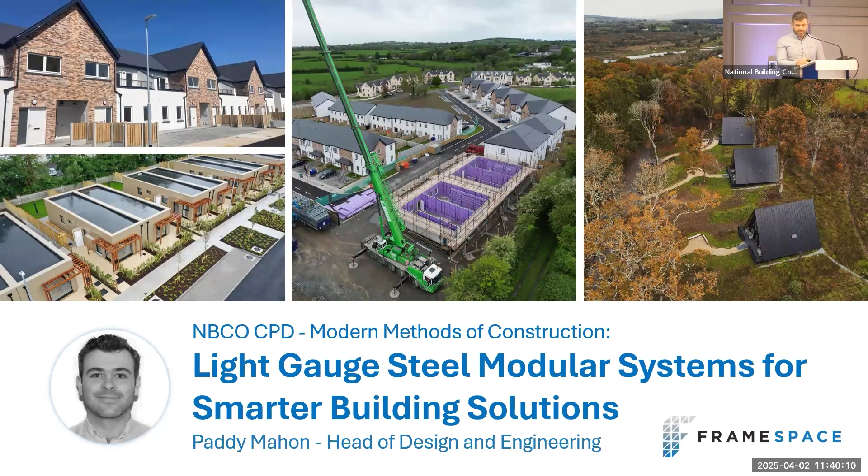My name is Paddy Mahon, as has just been introduced, and this presentation's title is Light Gauge Steel Modular Systems for Smarter Building Solutions. So what we're going to cover today: we'll do a brief introduction about Framespace, we'll talk about our processes, some testing and analysis we've carried out on our system, certification, some collaborations, embodied carbon studies we've done, and we'll run through some case study projects as well.

So about Framespace, we were started up in 2016. We're based in Longford Town, and we specialise in design and manufacture of light-gauge steel building systems for the residential and commercial sectors in 2D and 3D solutions. So what we do, we started off initially solely focused on a 2D panelised system, so category 2, a closed panel system with varying levels of finish applied in the factory. So we'll see a few pictures of that in a minute. And that expanded into 3D volumetric over time. So we do a modular solution now, and we try to get as much pre-manufactured value completed off-site with varying levels of finish externally and internally.

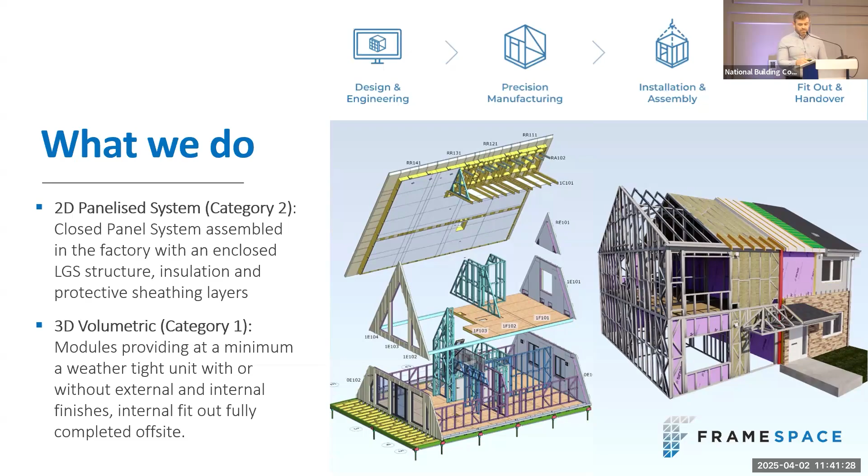With the 3D volumetric solution, you'd be looking at a pre-manufactured value of plus 90%, obviously depending on the building layout and the design of it. The fit-out is completed off-site, but early engagement and considerations are important if it's going to be incorporated into a project, and the buildings need to be designed from the outset really to incorporate that into them. It has a very high level of cost and program certainty, with the civils and substructure and just tying in between the modules completed on site.

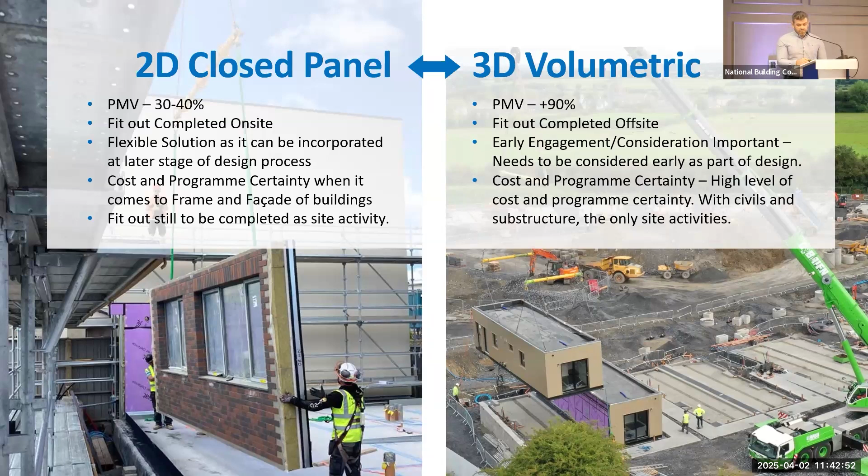So looking at our processes, our design and build workflow, we operate in a fully digital workflow from design to handover. So we operate in a common environment, both in design and factory and install. So we use Autodesk Construction Cloud for design, development, collaboration. We get the architectural plans in, we'll do architectural models, we'll work through the engineering, we'll develop the steel models, the M&E models, so everything is coordinated fully. From that, the fabrication information is extracted from the models automatically in some cases and just checked, and then that gets fed to the factory floor through our WrxFlo platform, which is our factory production control platform, and that follows onto site and is followed up on site through ACC inspections.

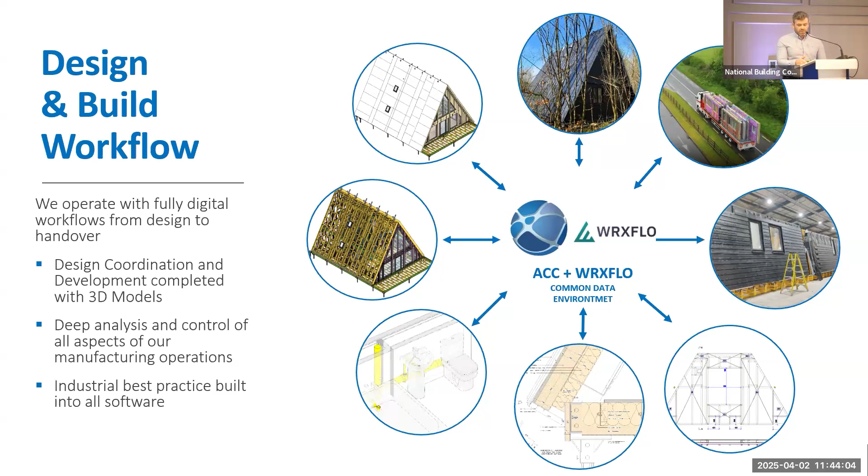So just to talk about our factory production control, we use a WrxFlo system, so it's a digitized platform for planning projects. All our QA checks are built into the platform as well. So at each station, guys check into a panel, they carry out their quality control checks specific to the activities that they're working on, and then they sign off. So it automatically generates a passport for each panel or each module, whatever we're actually working on. And the checks are tailored to the project specification that we'll be working on as well. It also tracks consumption and gives us full traceability on the materials used for each panel, each module.

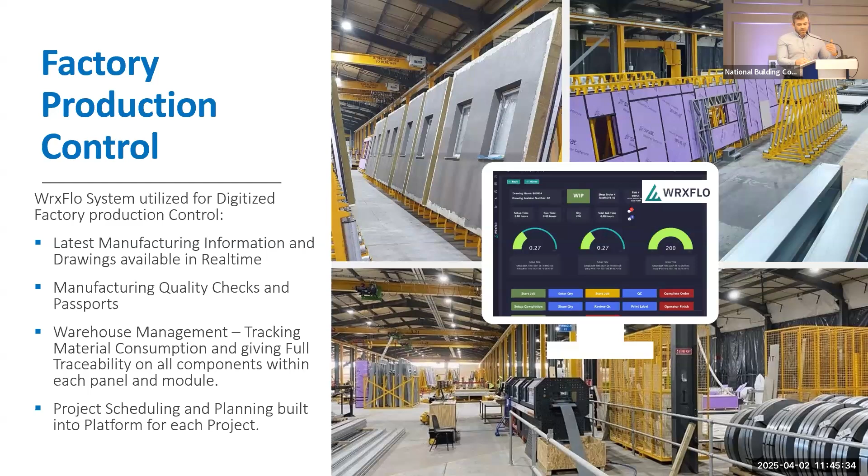So say with a panel, we'd have full traceability of what steel coil was used for that particular panel, where it came from, what date it arrived into our factory, who rolled it, all the way through to final sign-off, what lorry it got put on, and that follows through to the site team. We also do all our project scheduling on that, so the project is scheduled out on the platform, and then the floor operatives know what panel they're working on next. So it's all systemized in a way that they're built in the order that they would need to be installed as well. So that all works through.

So our QA/QC systems are, as I said, built into both WrxFlo and ACC. The factory control checks are carried out in WrxFlo for the factory, and as I said, the quality passport is produced for each panel. Again, we have 100% traceability for every profile manufactured in our plant, and then the site and install checks are carried out on ACC Build, which can be done on tablets on site with photos taken and the quality checks

built into it. I suppose the other important point to make is at the project outset, there's a project-specific inspection and test plan developed, and that's developed in conjunction with the design teams that we're working with, who will be carrying out ancillary certification, the assigned certifier. So we'll go through what checks we're carrying out, the different hold points, witness points that different team members want to be part of as well.

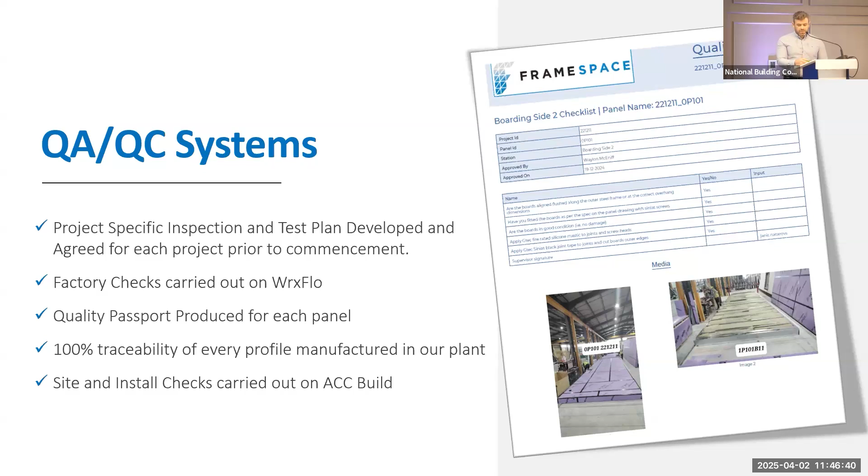So yeah, the majority of our workforce are direct labour. From an installation perspective, we do use some closely related third-party subcontractors as well, but all our sites are managed by our own project managers and site managers.

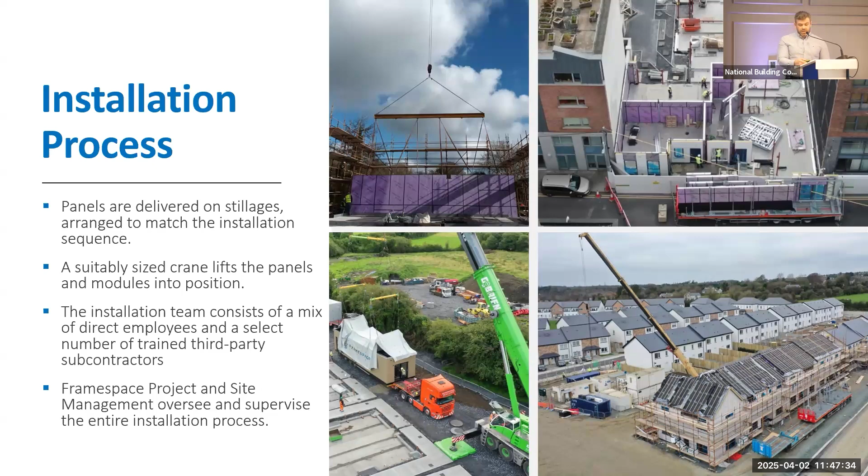So talking a bit about some of the testing and analysis that we carry out for our projects and for our system. So structure, Part A, which should be standard for all projects. All elements of the project are designed to project-specific conditions, such as location, building height, and elevation. They're designed and certified by a competent, qualified structural engineer. So they'd basically carry out a calculation package, they'd structurally model the building, and all of that would be part of the handover pack as well.

From that, we model all the steel in, both the LGS and any hot rolled steel elements. So that's done in-house by our own team, and is reviewed and signed off prior to manufacture by the structural engineer that had called up the different profile sizes and member sizes. So we would use Vertex for the LGS detailing, and we would use Tekla for the hot rolled steel detailing.

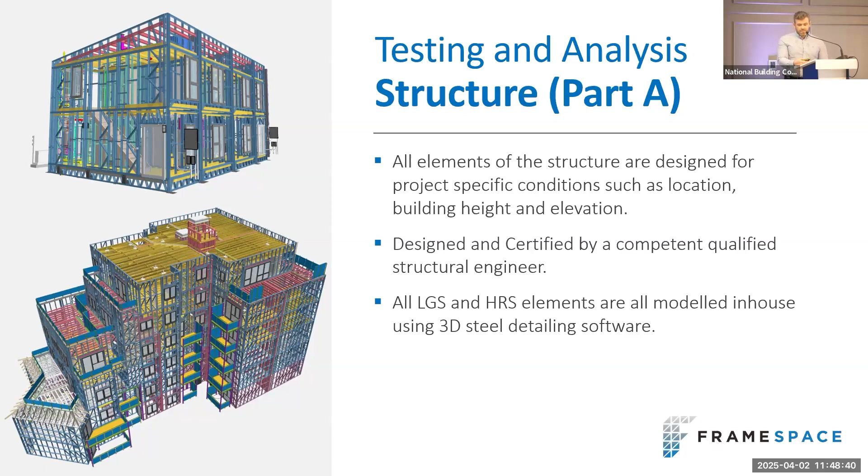Fire, Part B. So we have a full suite of loaded fire tests on our system for external wall, compartment floor, and compartment wall and load-bearing internal walls. So that would cover the 30, 60, and 90-minute fire-resisting requirements. We don't rely on third-party assessment of our system.

So in terms of how we would develop the test panels or the tests we would carry out, we would design them in such a way that it would be the most onerous test for that particular type of panel, so that we could use the field of direct application to upgrade the steel or quantum of steel that would be in it, or the boarding arrangement on the outside, or in terms of services that might be fitted in a wall.

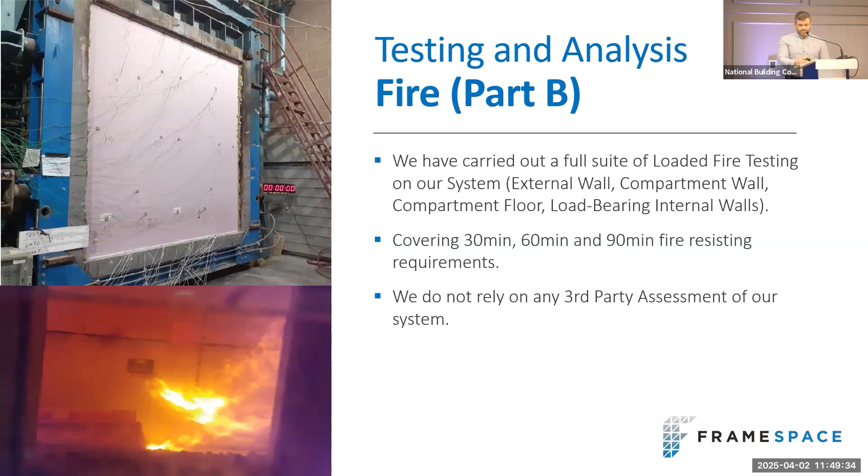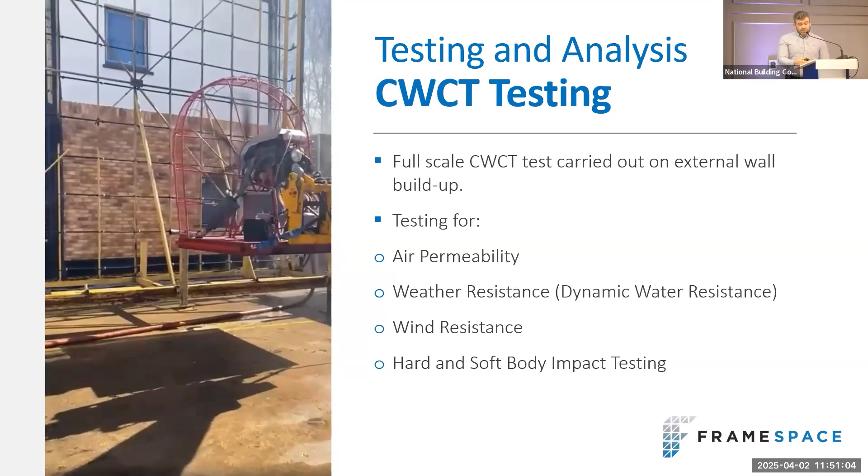There's 2 windows built into the facade also, so they're the key junctions that we needed to test: window frame, the reveals, sills. And then finally there's a very onerous wind resistance test carried out, and that's done by applying pressure within the chamber. At the end of all of that, there's hard and soft body impact testing carried out on the facade. So that's to see how it performs after all of the applied forces. So at any one stage, if water enters the chamber, it's a fail, and you start the test from the very beginning again. So it's a very onerous test and quite a difficult one to pass.

Hygrothermal testing. So we've had a panel tested in a hygrothermal chamber, which exposes the panel to repeat heat-rain cycles followed by repeat heat-cold cycles at controlled humidity conditions. So this is designed to simulate naturally occurring conditions over time.

Post the weathering cycles, there's bond and impact tests carried out on the finishes on the wall to see how it performs in terms of adherence of the materials. So we ran through our panel twice, basically, to mimic two full-scale cycles of the hygrothermal testing, and it performed without any issue, which is really positive.

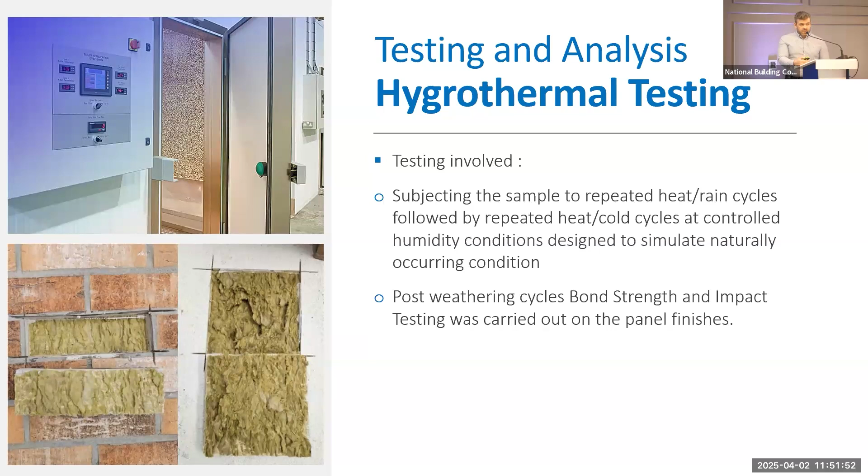Acoustic Part E, which will be carried out on all projects as well, all party walls or separating floors. So at the outset of developing the system, we would have done a suite of acoustic lab tests, and that would have been to try and see what sort of build-ups would work from a compliance perspective, and look at that in conjunction with our fire testing as well to try and get the optimum solution.

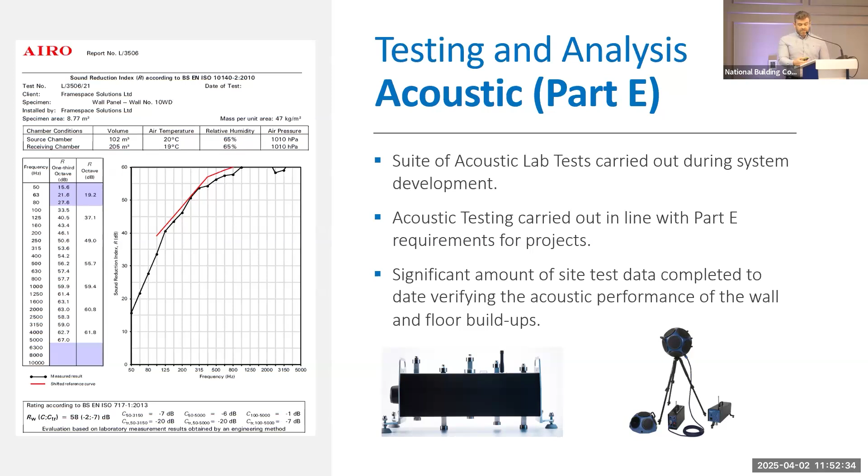So again, all acoustic testing is carried out in line with Part E requirements for projects, and we have a significant amount of site test data at this stage. Fabric testing, or fabric performance, so Part L. So we have a full suite of thermal models complete on 2D and 3D junctions, so that'll be for our standard junctions. We end up doing bespoke modelling then for project-specific junctions as well, wherever it would be required.

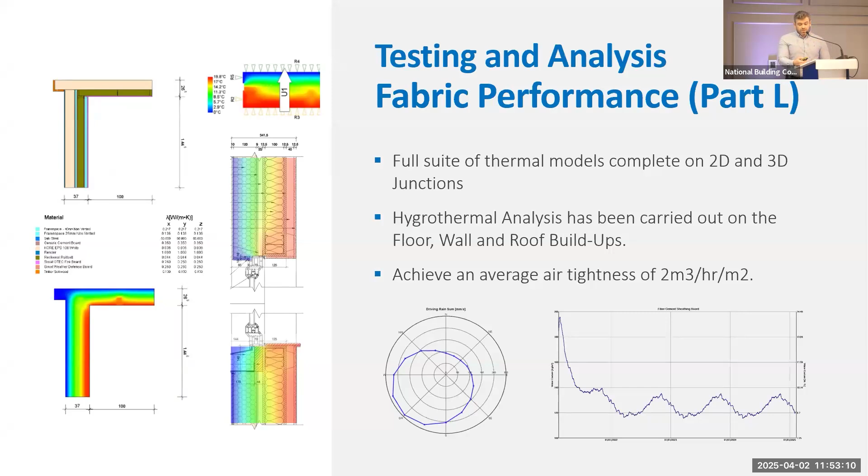And then in terms of hygrothermal analysis, we'd have that carried out on our floor, wall and roof build-ups for the different projects as well, just to show there would be no issue in terms of condensation. On our jobs, we typically achieve somewhere between 2 and 3 cubic meters per hour per square meter in terms of air tightness.

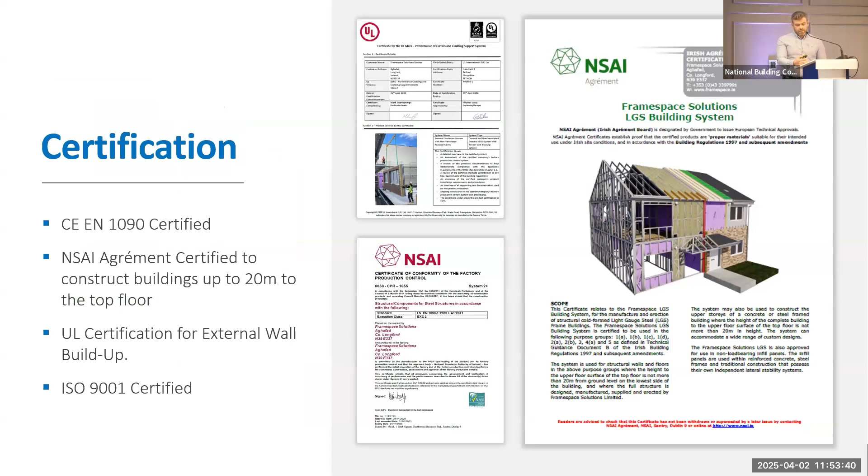So in terms of certification, what we hold, we have CE EN 1090. We have our NSAI Agrément cert to construct buildings up to 20 meters to the top floor, and that's for the LGS frame system. So we're just working through the final stages of an update to that as well, to include an external wall build-up. We have UL certification for our external wall build-up, and then we have our ISO 9001 also.

So just a bit of a case study. We'd worked with the NSAI around the MMC ancillary certification process on a project. So we were awarded the first ancillary certification on a project in Harold's Cross in Dublin. The offering was developed by the NSAI to help support and deliver the government's Housing for All initiative with the use of MMC, supporting project design teams and assigned certifiers with the inspection and certification of MMC systems that hold

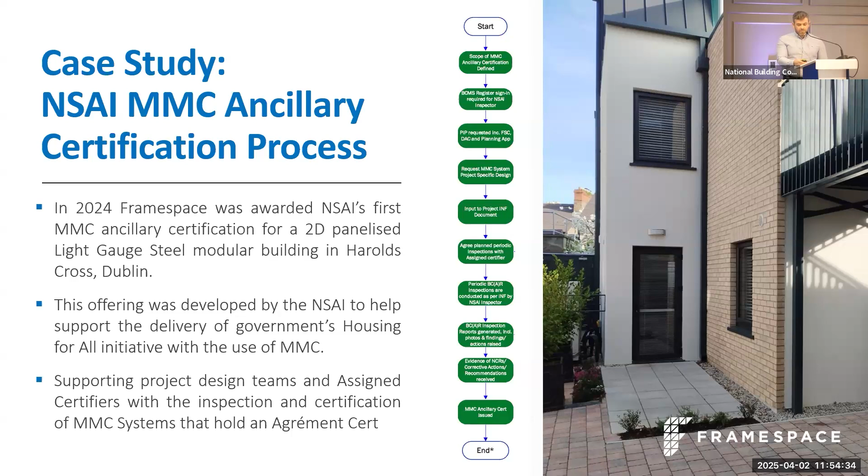an Agrément cert. So we were in the process of updating our cert, and just to help bridge that and give comfort to the assigned certifier on the project and the design team, this process was taken up, and it worked really well. The process involved rigorous NSAI assessment, including a desktop study of the manufacturing construction drawings, inspection of ongoing off-site manufacturing and installation of the LGS and facade process, assessment of site preparation prior to assembly, and inspection of the LGS

internal and external finishes. So all in all, on that project, I think we had about 15 different inspections from the NSAI assessor, so it was very robust, really good process, and we worked really well with the NSAI. So I know Martin has said there hasn't been that big of an uptake on it, but I think it is something that hopefully others will look at, and it's a good way of bringing everyone on the MMC journey as well, just to give comfort around that.

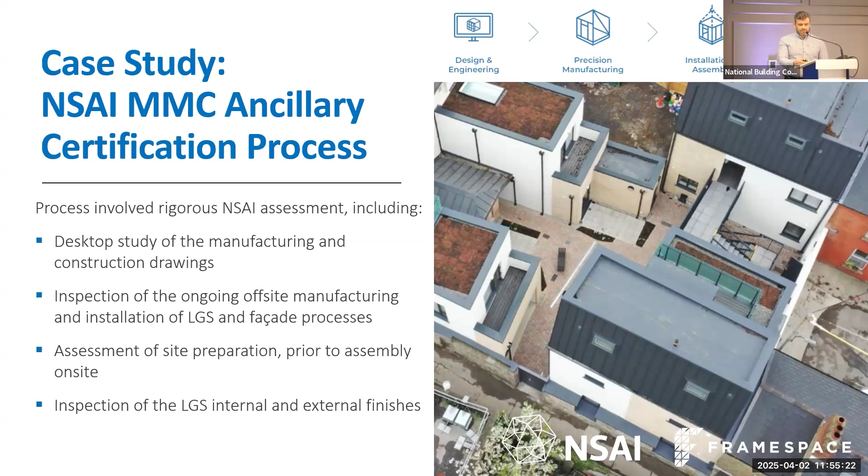So collaborations, we're a Construct Innovate associate member. We were awarded two Construct Innovate Seed Fund projects in 2024. So we're working with the University of Galway on two studies. One is around reducing embodied carbon in the manufacture of LGS modular solutions or construction. So we're looking at alternative materials, just where we sit in the landscape, and what ways we can look to reduce that, even in terms of the size and forms of buildings.

The second study we're doing is optimizing slot and stud panel connectors for light gauge steel. So we're just looking at a more innovative way of completing the vertical connections between panels to try and give a more robust and accurate connection, and also speed up the process. So both of those studies are currently underway.

So I'll just talk a bit about an embodied carbon study we completed on some 3D modular houses. So we carried out an LCA after the building was constructed. So reduced embodied carbon wasn't specified at the outset. It was more commercially based.

So when we did this for the entire life cycle assessment, we performed quite well in terms of factory production, and site elements were lower than traditional forms of construction. But when we looked at stages A1 to A3, which is to do with the materials in the actual build-up, 69% of the embodied carbon in the actual building was because of the material. So that was somewhere we obviously identified to see if there was a way we could look to reduce that.

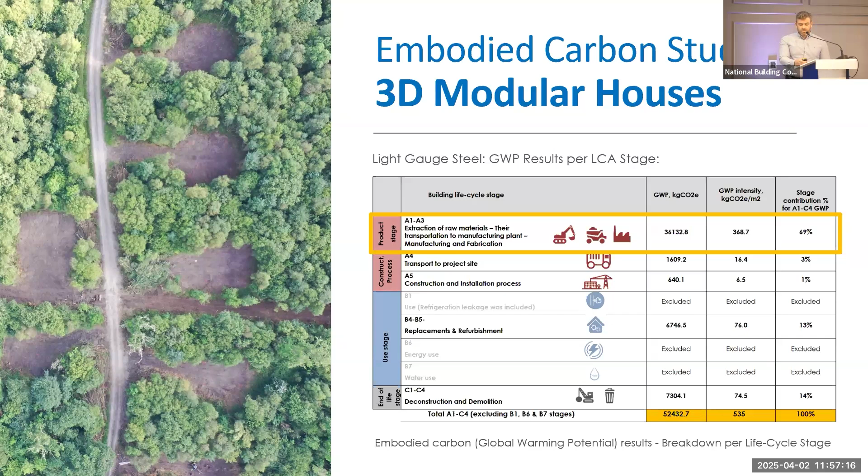So we went about looking at different materials that we could use to try and reduce the embodied carbon. And the first place we looked was obviously the steel. So there was a very significant reduction in the embodied carbon just by going with a greener steel, a more sustainably produced steel from Germany, but there are a number of them on the market. So that's steel produced with electric arc furnaces and with sustainable renewable systems on site to offset against the production energy. So just with that alone, that brought us right down to 420, nearly on par with the timber frame solution.

We also looked at 2 other optimizations. So one was around the removal of a concrete slab underneath the modules, because there was already a floor in the modules, and we could look at removing one of the boards from inside, but that would require further fire testing. So we also included that. When all the optimizations were in place, it brought it right down to 386, which is a huge reduction from where it had been at 535.

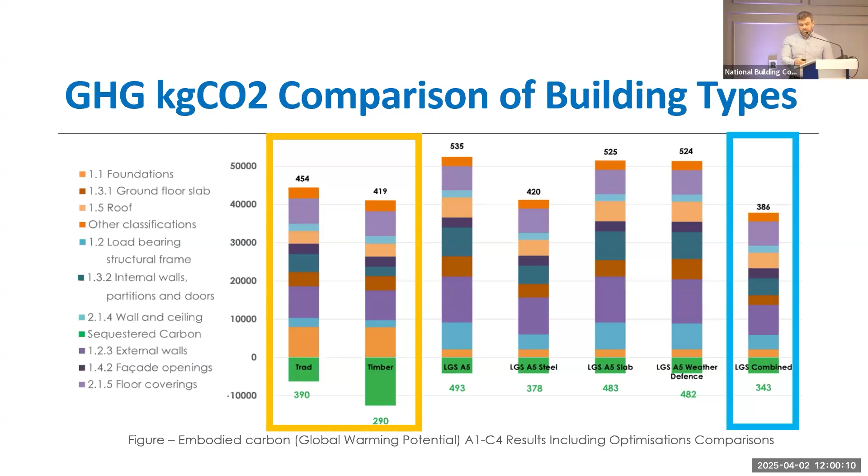So case study projects, we'll have a look at the URMH modular homes, the KCR apartments, Riverside Manor in Kilcullen, Kildare, Drumhearney Hideaway, and a project we're working on at the minute is the MMC demonstration park in Mount Lucas.

So the URMH modular homes, this is a large project rolled out for the Ukrainian refugees that were coming into Ireland. We worked with Sisk and the OPW on this, and we delivered, I think it was 166 units overall. So you can see images of the single-story units there, finished out with the landscaping. The pre-manufactured value of these particular units was around 93%, I think we worked it out to be, with just cappings and flashings applied on site.

It was a really collaborative approach with the design team because it was very innovative. So we worked with fire consultants, architects on the project, just to work through the route to compliance with all of this as well. And look, we also worked with other manufacturers, so it was quite an unusual project in that way that we collaborated with other manufacturers to produce the exact same modules with the same performance.

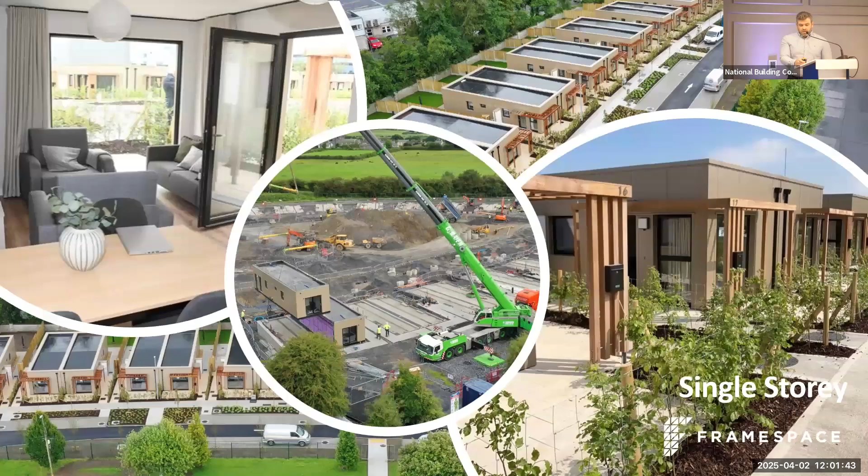There are some images of the centre pictures, modules being lifted into position. Again, you can see in the top left is some of the finishes inside, so most of the finishes would have been fitted in the factory with the loose furniture and light fittings and curtains and stuff fitted on site.

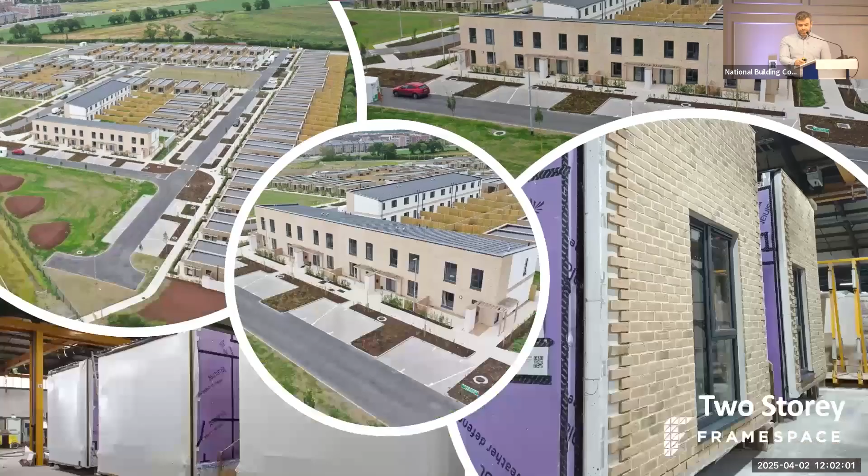As part of that project, we also did a pilot scheme for 6 two-story houses. So each house was a 3-bedroom house, and it consisted of 4 different modules. So there was that interconnectivity piece. There was a lot of coordination required in terms of M&E, in terms of fire compliance, and just working through all the eventualities in that.

So it was a really successful project, and once you walk around the house, there is no evidence that it is a modular house, which is, I suppose, what we're always trying to work towards. But it's worked out really well, and hopefully we'll see more schemes like that.

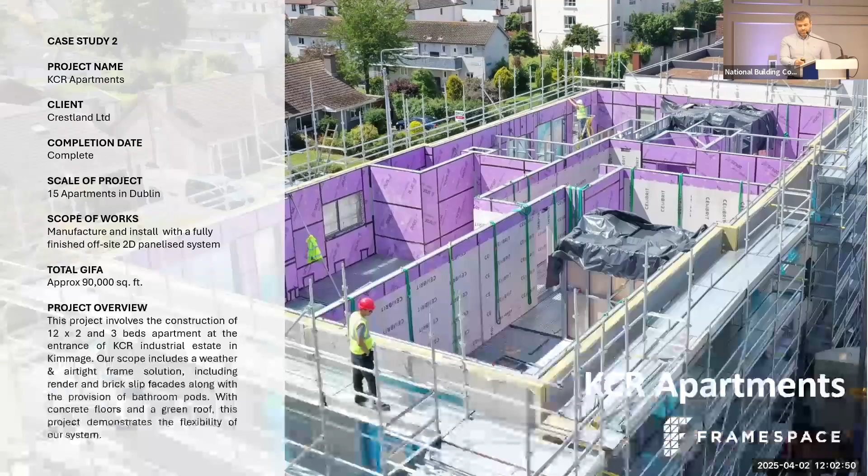The KCR apartments project, so that was 15 apartments in South Dublin. It was a 2D project, so you can see there what a 2D project looks like during the install. All the external walls had the external insulation system on the outside with windows fitted. The party walls came boarded, so they already had the fire and acoustic rating.

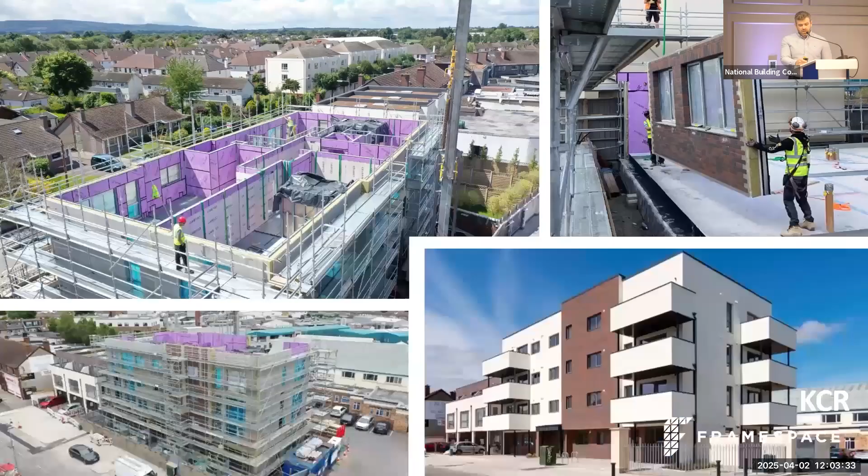So we'd land all the floors on top of that and get another lift of walls all the way up to roof level, get the building sealed, and that allows the M&E fit out and other fit out to be completed. There are just some other images of the project. You can see the top right of the ground floor panel being lifted in, and the bottom right is the finished product.

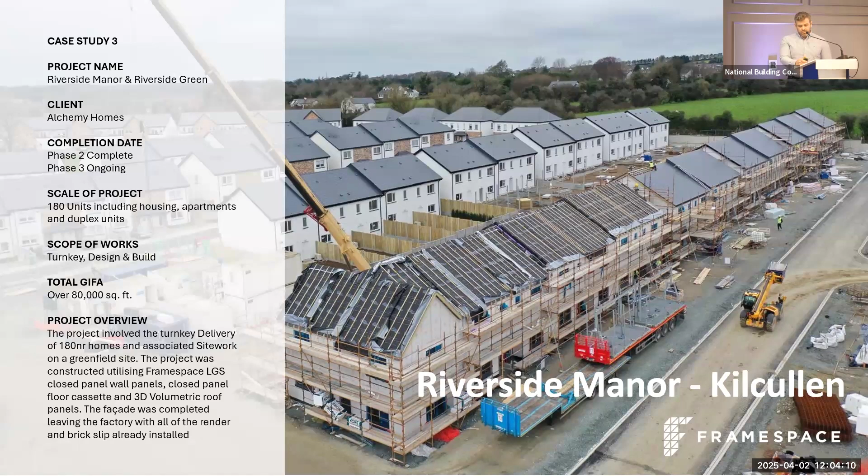The Riverside Manor and Riverside Green project in Kilcullen in Kildare. So we're currently working on this project. It's 180 units, mix of houses and duplex apartments. We had finished phase 2, I think it was the year before last, which consisted of 70 houses and duplexes as well. So we're working through this, which again, it's going quite well. You can see some of the other images from the project.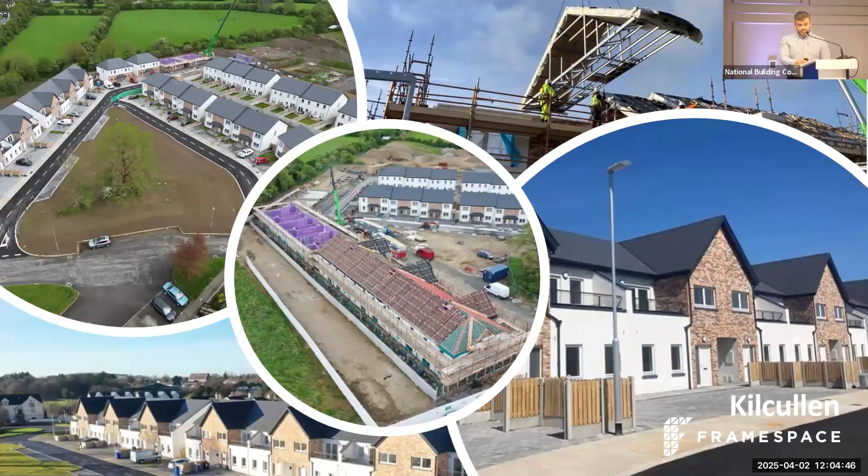Drumhierney Hideaway, so this is in Leitrim Village. It's quite a unique project and had a unique set of requirements. So the client wanted to build a number of chalets in the woods in Leitrim Village, but he didn't want to introduce any concrete into the environment. So we had to come up with a solution that would work there in terms of foundations and avoiding the need for scaffold as well, because we wanted to avoid having to cut down or remove too many shrubs or trees local to the units themselves.

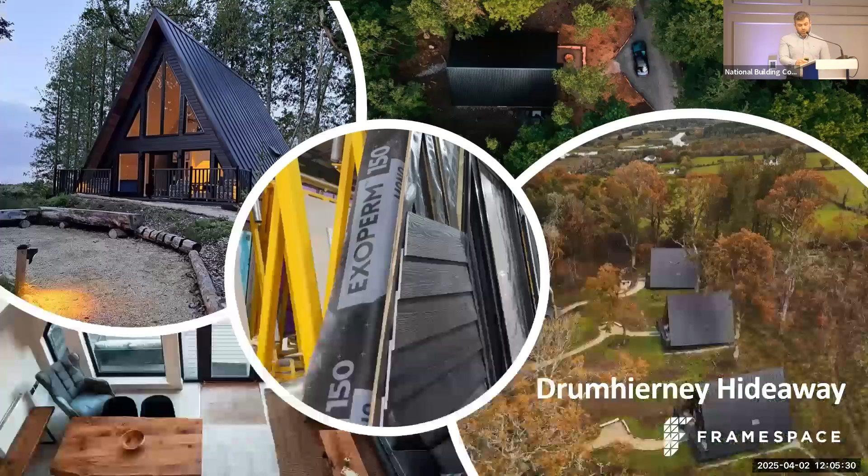So we came up with a screw pile solution there with the floor panels landed onto them, and worked our way up. It was quite unique, and there were quite a few challenges in terms of performance of the building that we had to work through, but it all got worked through. In the finished product, you can see the top left is one of the triangular buildings, which is very unique. In the bottom right is a row of them in the forest, and so it's a very unique project, but it's one we're very proud of as well.

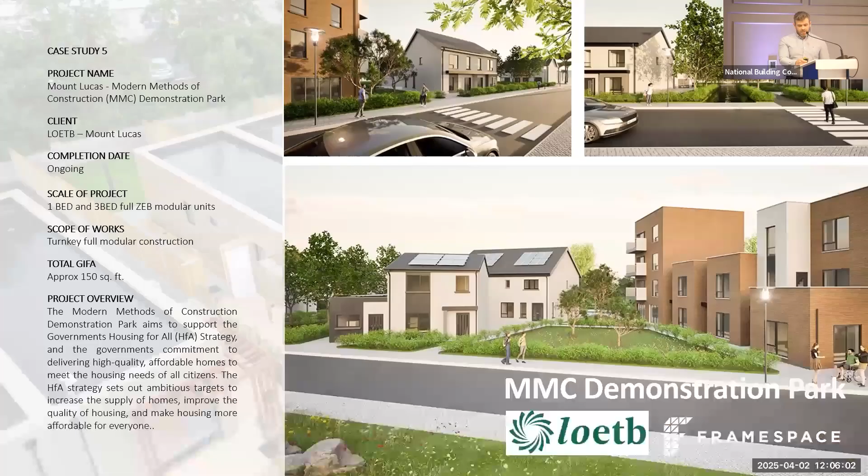The Mount Lucas MMC demonstration park, so I think this was touched on in a couple of slides already today. So it's one where we're working on two particular units there. One is the 3-bed house and one is the 1-bed house. So I think we're getting closer to kicking off on the project anyway. The design is very much developed on it, and hopefully we'll get going later in the summer on that particular project.